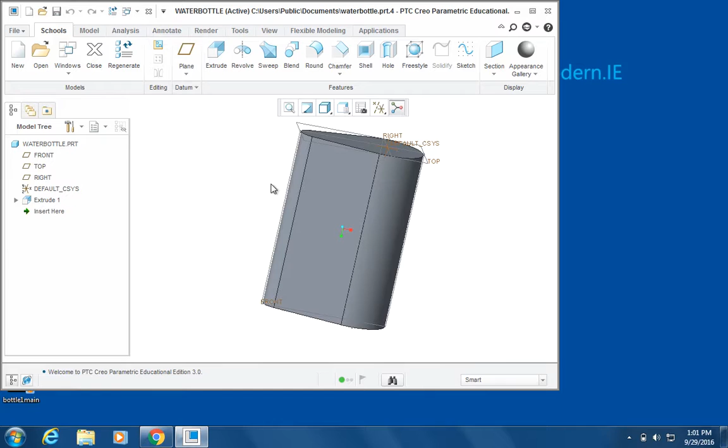Remember that we had created a two-dimensional sketch. We had joined two circles of different diameters with tangent lines, drew our sketch, and then extruded that sketch into a three-dimensional object, which is what we have here.

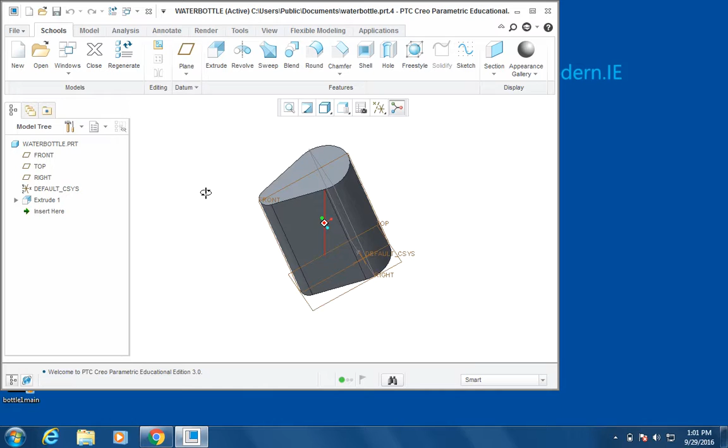The next thing that we're going to do is start to cut out the handle. So if we take a look at the PDF, we see that there's a hole in the body of the water bottle, where a handle should be.

So this isn't just a straight cut through. This is actually part of a revolve.

Part of the ergonomics of the water bottle is it's designed to be carried by a runner or by an athlete as they're exercising, and so it needs to be comfortable, it needs to fit comfortably in the person's hand.

So what we're trying to do is, from an ergonomic standpoint, the human body doesn't like sharp edges, it doesn't like 90-degree angles and that sort of thing very much.

So what we always try to do is try to round and add rounding features, soft rounded features, to all of our edges. We're going to accomplish this cut inside of the body of the water bottle with a revolve.

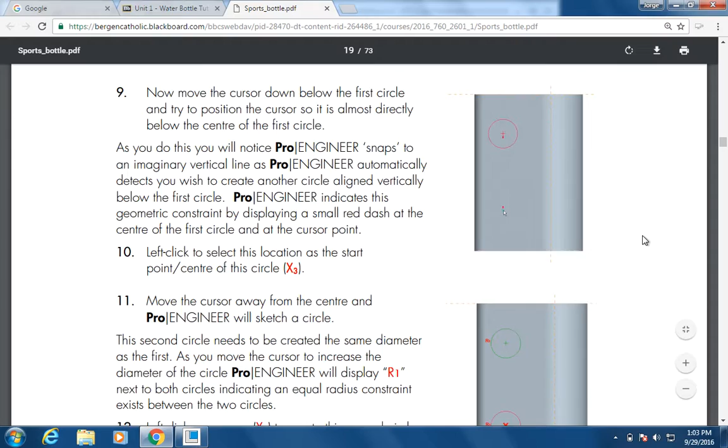The revolve itself, what we're going to do is fast forward here to the sketch itself, and let me find the final dimensioned sketch. Here it is. Okay, let me zoom in on that a little bit.

What we see is basically two circles of diameter 30. So we have a linear dimension on a semicircle here. I know that this is a semicircle because the endpoints of my arc are even with the center point of the circle, so I have a semicircle built from a circle.

The diameter of that circle is going to be 30. So if you take a semicircle or a circle and you measure it at its widest part, you're going to get the diameter.

Down here, this circle is going to be the exact same size as this circle up here. So we're going to constrain the bottom circle to the top circle, and we'll see how to do that in a moment.

The centers of the two circles are going to be lined up along a vertical line, and we'll see how to do that. And then we have other dimensions that tell us exactly where on this bottle this cut, or this sketch, is.

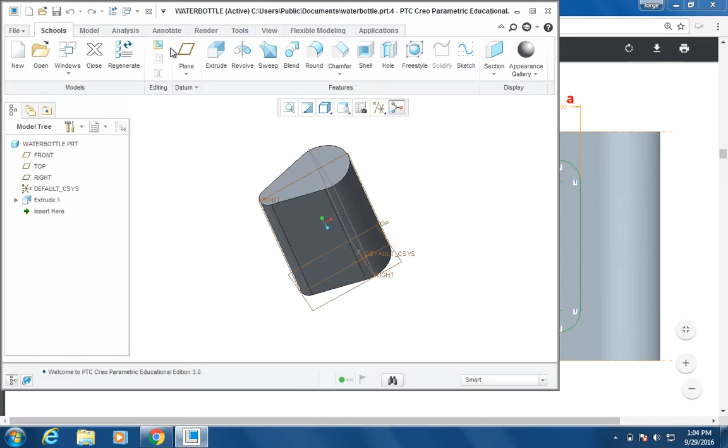So let's go back to our bottle, and let me expand that view a little bit. Okay, there we go. The first thing I want to do is set up my view again.

Default CSYS, that default CSYS is kind of in the way, so I'm going to go to the View tab and turn off that view. But I need my planes view to be on.

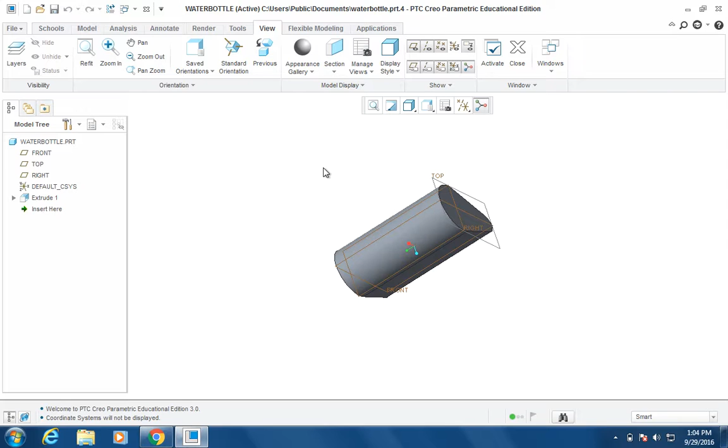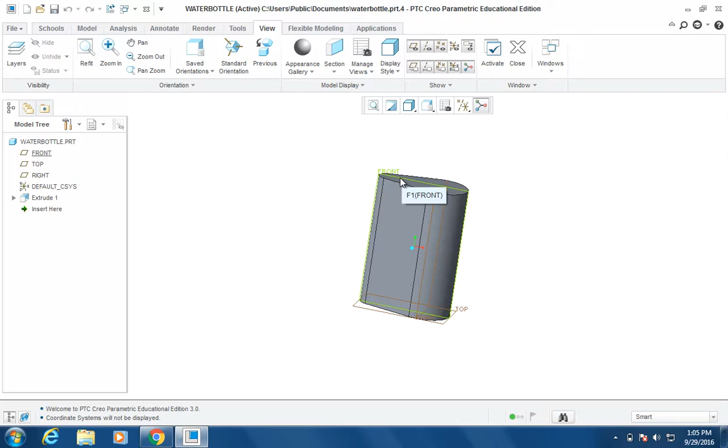For this exercise, I'm going to roll my bottle over so that it's more or less in this view, because ultimately what we're going to do is draw on the front plane.

So we're going to draw on the front plane, and I want the skinny side of the bottle to be to my left. We can always modify that in the sketch setup, but it's usually easier if we just get the model in more or less the view that we want from the get-go.

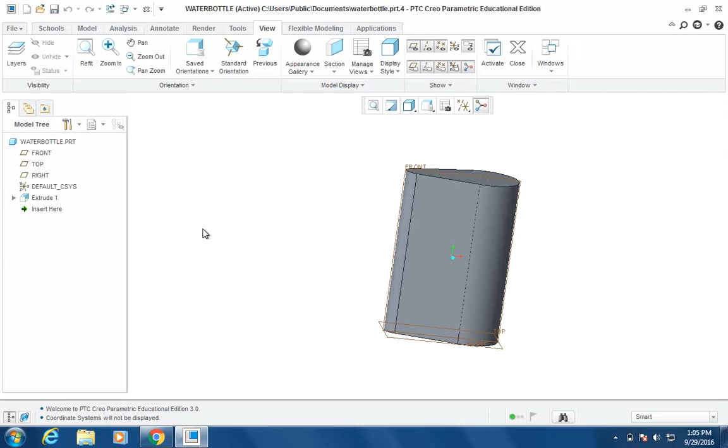So here what we're going to do, we're going to go back to the Schools tab. Remember that all of the tools that we need to add features to our three-dimensional model are going to be under the Schools tab.

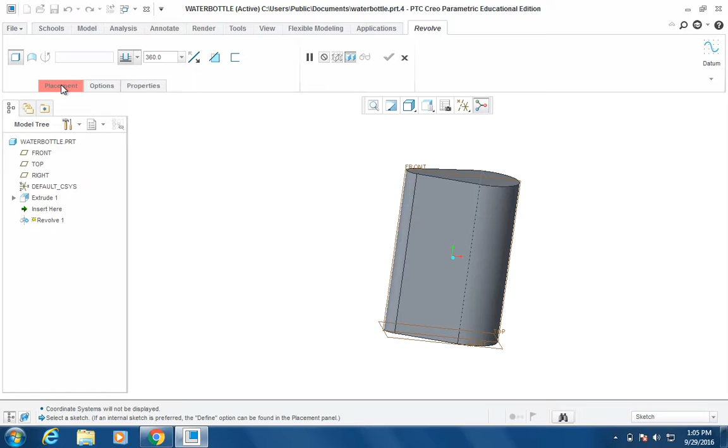This time we're going to create a revolve. We're going to click on revolve, and we're going to place the sketch. Creo tells us that it needs to know where to place the sketch, so we'll click on that, click on define.

Then what I want to do is take a look and make sure I'm selecting the correct plane. In my case, it's going to be the front plane.

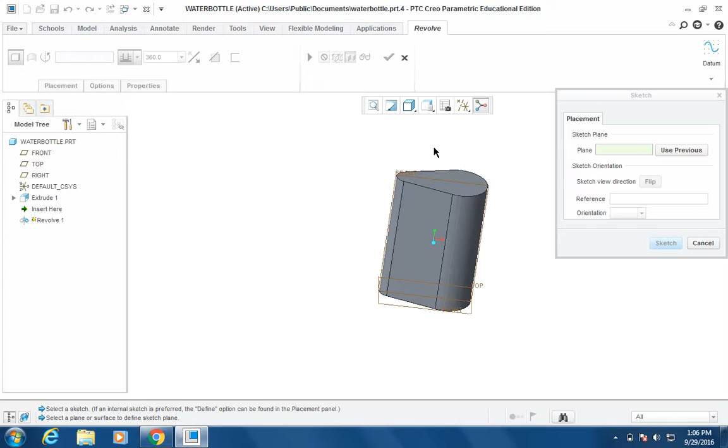I want to draw on the plane that bisects the bottle into two equal but opposite halves. So I'm going to select the front plane, click on that, and then go ahead and click on Sketch.

All right, so we're back in the Sketcher toolbox. The Sketcher toolbox for a revolve and the Sketcher toolbox for an extrude are basically the same thing. We have access to the same tools. So we're going to use the circle tool, the center and point tool to start.

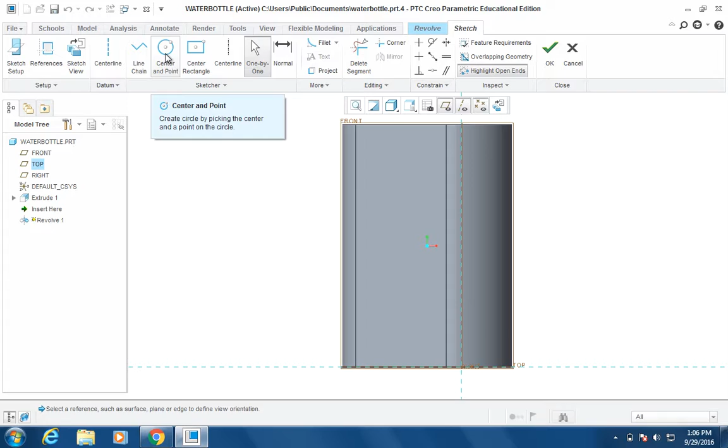I'm going to draw two circles. For the first circle, I'm going to select the tool. Remember that we have to set the center of the circle somewhere. It doesn't really matter where we set the first one. I'm going to left click and release, drag it to an approximate size. It doesn't have to be perfect. Then left click again. So I've set my first circle.

Now the second circle, what I want to do is make sure that I draw it directly below the first circle. So as I drag that center point around, you can see that at certain moments I get a little dash pointing at the center of the first circle. That tells me that proposed point is directly below, on the same vertical line as the center of the first circle. So that's where I want to be, directly below that first circle.

When I click and release and start to draw the circle, at one point I'm going to get an R constraint. That means an equal radius constraint, which means my two circles are the exact same size right now. Because if I have two circles with the same radius, that means they have the same diameter, which means they are exactly the same size. So I set up my second circle to be directly below and the same size as the circle above it. I'll left click again and set my second circle.

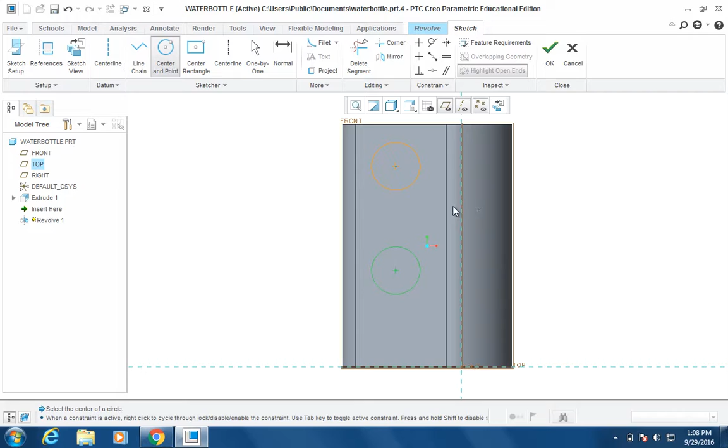I'll deselect my tool. If we zoom in on the dimensions, you'll notice I have a dimension for the first circle in terms of diameter, but not for the second circle. What I do have is an R1 constraint between the two, and if I mouse over that, it tells me constraint equal radii. Obviously this constraint is going to be strong, so no matter what I do to the first circle, it's going to affect the second circle.

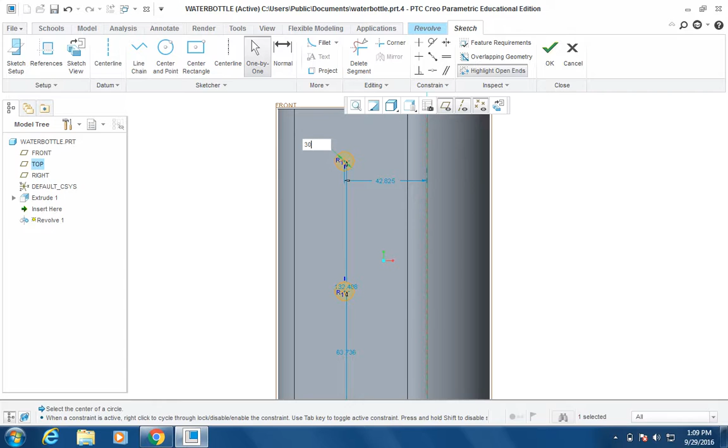I know that the diameter of the first circle has to be 30, so I can go ahead and set that. If you watch the bottom circle while I set the diameter for the first circle, you'll notice it expands as well. So if I change that value to a smaller number, say 10, you can see a much more marked difference. We know the circle itself needs to be, let me double check my dimensions, 30. So I set that value to 30, and the second circle underneath it is the same.

The next thing I want to do is connect the two circles together with tangent lines. Again, I can use the line chain tool. There's a couple of different ways to do this. Since the two circles are the same, I can start the line segment at the midpoint, or on the same horizontal line as the center of the circle, or I can just connect the two and use the tangent tool like we did in the first part of the body of this bottle. But we'll shortcut this a little bit.

I want to start that line segment on the same horizontal line as the center of the first circle. Left click and release, pull that line segment straight down, and we'll release when we get either a tangent constraint, a T constraint, or that same horizontal constraint, the point on horizontal line constraint as before. Once I get that, I can click, and then center click to deselect the current line. We're going to do the same thing on the other side, with the same kinds of constraints.

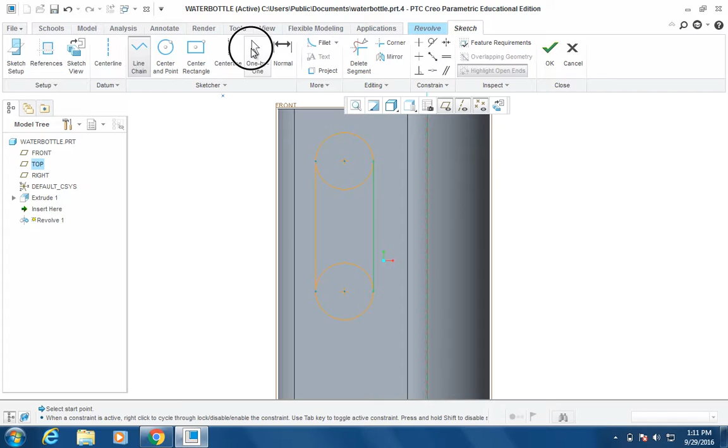And then I'll deselect the tool and see where we're at. Okay, so here you can see I have a couple of constraints here. This is telling me I have a tangent constraint, and down here a horizontal alignment constraint. When we're dealing with circles that are exactly the same size, it doesn't matter, right? It's the same kind of constraint. It might be called something different, but it gives me the same rules for both kinds. Over here, we have a tangent constraint at the bottom and a horizontal alignment constraint on top. All right, so that's good there.

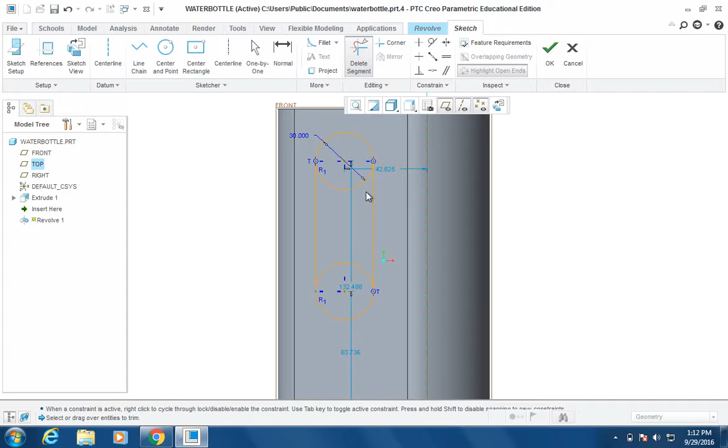Okay, the next thing we want to do is trim away the inside arcs of these circles. Remember we did that in the first example as well, using the delete segment tool. So I'm going to select the delete segment tool, click on the first arc, click on the second arc. And now basically the sketch, in terms of its basic appearance, is correct. I can go ahead and deselect that tool. Creo lets me know I have a good sketch so far, that it knows where it's going to add or remove material, because it's all colored to the inside now.

Okay, next we're going to place the sketch. So where exactly on the body of this bottle does the sketch belong?

Okay, so the first thing we look at here is this dimension. I know that the top of the arc to the top of the bottle is going to be 20, and then the bottom of the arc to the bottom of the bottle is going to be 20 as well. Again, I don't know how long these tangent lines, these vertical lines, are. I really don't care in this example. We can always figure it out if we have to, but we don't really care. All I know is the bottom of the arc is going to be 20 from there, and the top of the arc is going to be 20 from there.

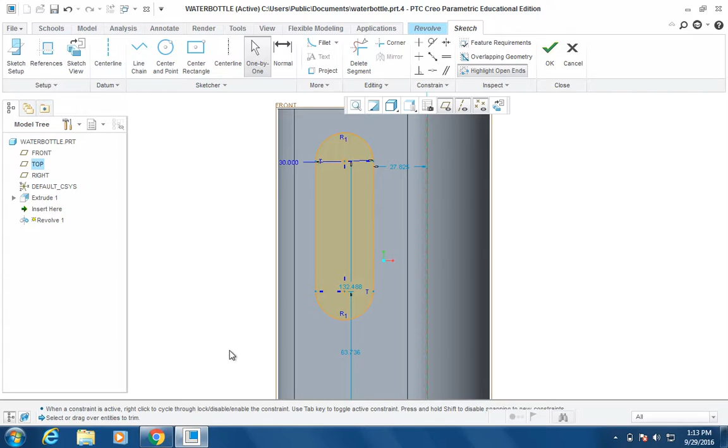So we'll go ahead and set those dimensions. To do that, let's zoom out a tiny bit. Okay, we're going to use the normal tool. The normal tool creates dimensions for us - it's either going to give us an angle dimension, an arc or radius dimension, or a linear distance. So what we're going to do is set up a linear distance here.

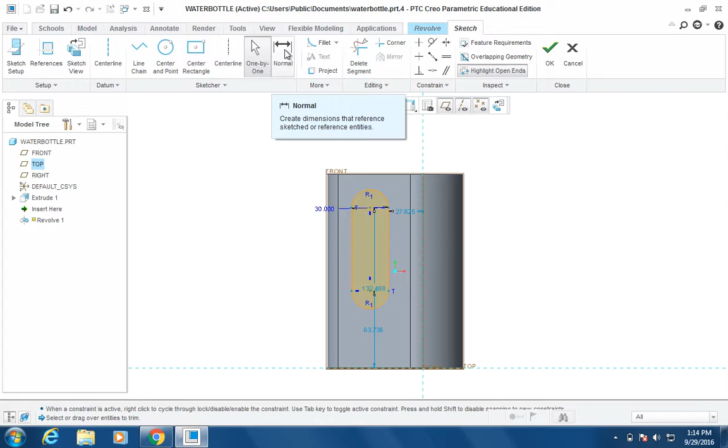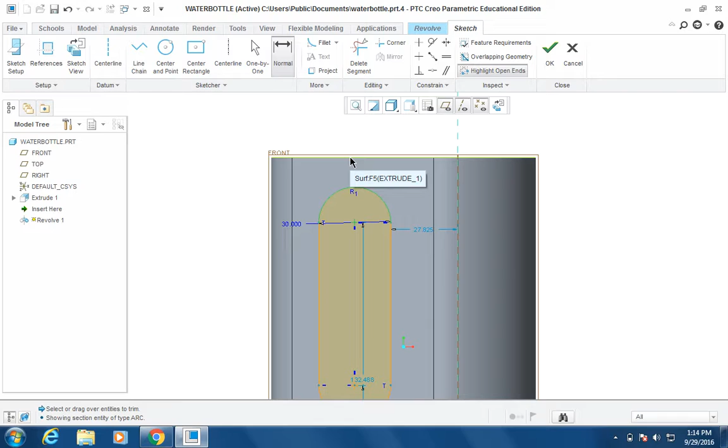I'm going to click on the normal tool. The way this tool works is we left click on the first entity we want to set a dimension to, then left click on the second entity. So we left click on the top of the arc first, then left click on the edge, that top surface of the bottle, second. Then I'm going to center click somewhere between those two points.

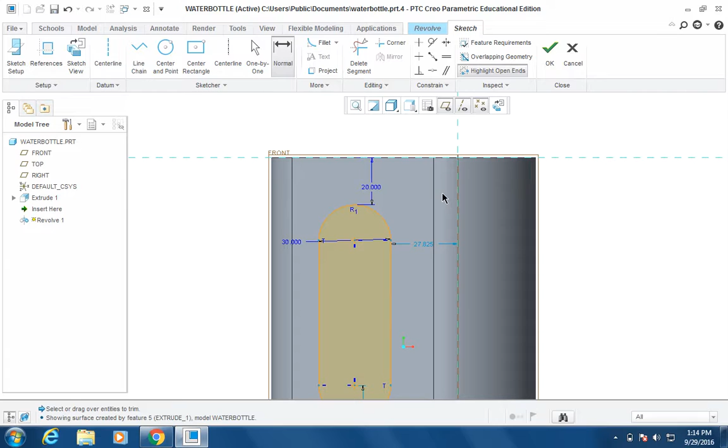A dialog box, a text box, pops up right away and asks me what distance I want here. So I'm going to go ahead and set that value to 20 and hit enter. You can see the whole sketch has been pushed down so that it's the correct distance from the top of the bottle.

We're going to do the exact same thing on the bottom. Let me slide down here. I still have the normal tool selected. I'm going to select the arc, left click there. I'm going to select the bottom edge of that bottle, or the line reference - there's a reference there, so I can use that as well. Left click there, and then center click between the two points.

It's going to ask how far away it's going to be, and we'll set that value to 20. You can see the sketch got pulled to the correct size. It's the right size now, just not placed properly yet, but we're getting there.

We can go ahead and deselect the normal tool. Next we want to look at the distance from the left edge of the bottle. Even though this is a rounded surface, when dealing with two-dimensional sketches, we always think about edges. The way Creo refers to these rounded edges is a silhouette.

Think about it like a shadow. If this bottle was to cast a shadow, where would the shadow be? We take a look at the distance from the vertical line of our sketch to the edge, the silhouette of the edge of the bottle, and that distance is going to be 25. That's what these lines indicate.

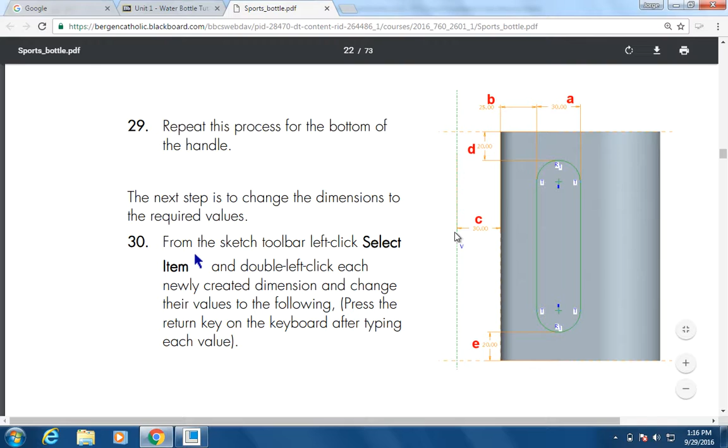So we're going to go ahead and set that dimension. Using the normal tool, I'm going to select that left edge, that left silhouette, so you can see it highlights in green, and I also get a pop-up that says SILH, which is for silhouette.

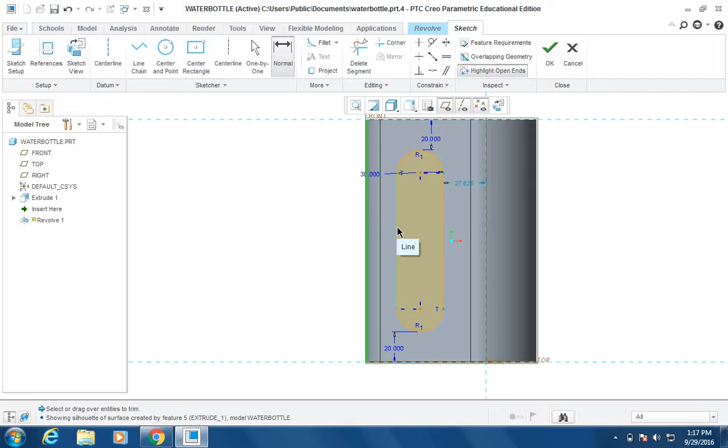I'm going to left click on the leftmost vertical line of my sketch, and then center click between those two points. It's going to ask me again how far do you want that distance to be. I'll say 25, and it will push or pull the sketch into the correct position.

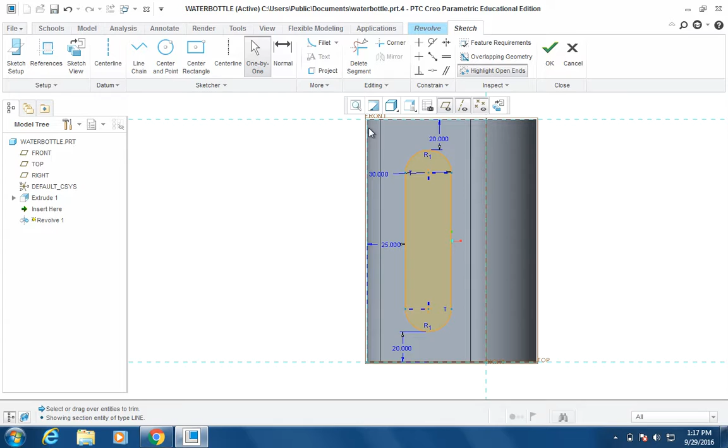At this point I actually have the sketch in the correct spot. Everything is where it should be. I'm 20 from the top, 20 from the bottom, I have a diameter 30 circle. Let me deselect that tool. I have a diameter 30 circle, and I'm 25 from the left edge. All that stuff is good.

The last bit of a revolve is to specify around what axis we are revolving. Anytime we deal with a revolve, what line are we going to spin that drawing around to create our feature? According to our sketch here, or our schematic, we have this axis out in space, which we need to create.

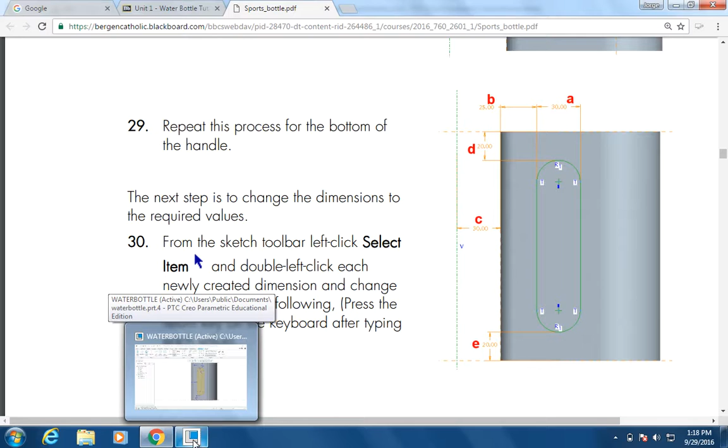We're going to go back to Sketcher in Creo, and we know this is going to be 30 away from that edge. So what we're going to do is create a center line. Go to Datum and create a center line, or select the center line tool.

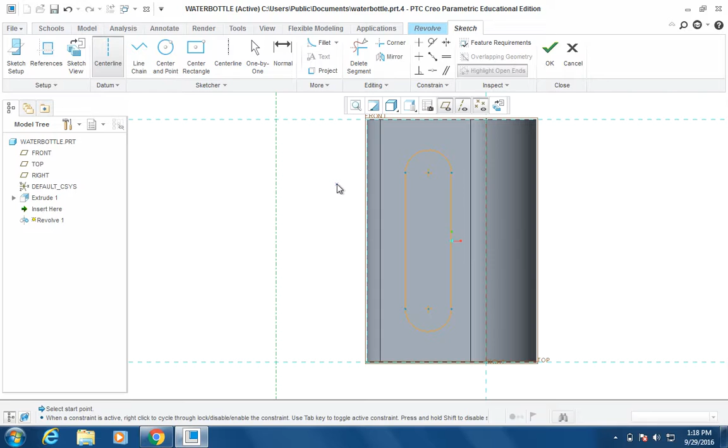The center line tool works by placing an X somewhere in space or somewhere on the model, and then we can rotate it around until it gives us a vertical line. Obviously we are revolving around a vertical line in this setup, so I'm just going to left click to set that center line out in space.

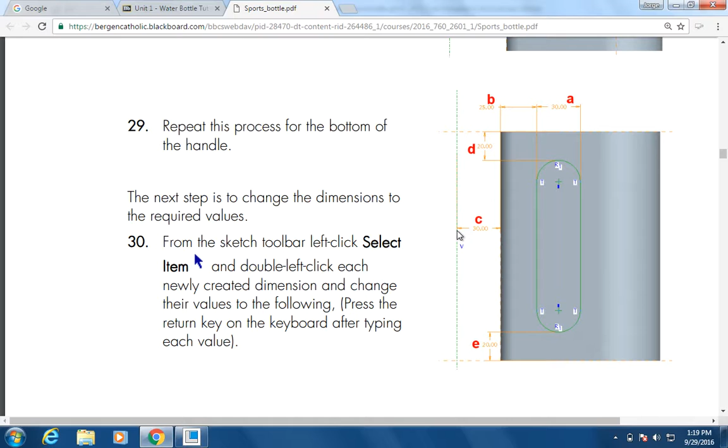The next thing we want to do is set the distance of the vertical line of that axis we just drew to the left edge. If we take a look at this schematic, this 30 tells me that from the left edge of the bottle to the axis, or to the center line, is going to be 30.

So I'm going to use the normal tool. I'm going to select the center line, then select the left edge of the bottle, so left click, center click here, and we're going to set that value to 30.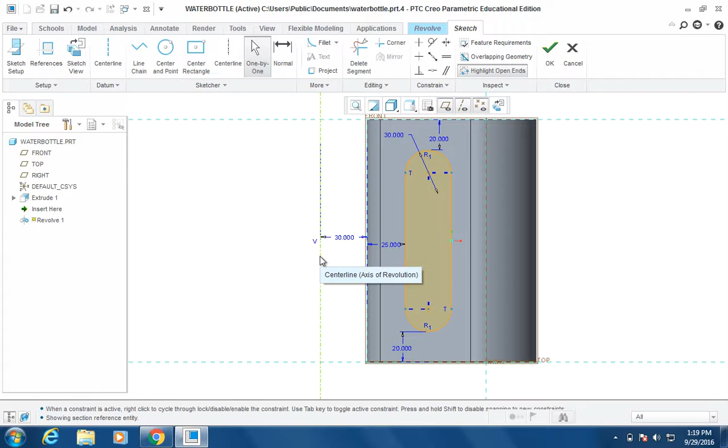Deselect the normal tool. The last bit of this is we need to specify that this axis is going to be the axis of revolution. In previous versions of Pro E, we would have to specify that that was going to be the axis of revolution, but here on this new version of Creo, it automatically sets that axis as the axis of revolution when we use this datum center line.

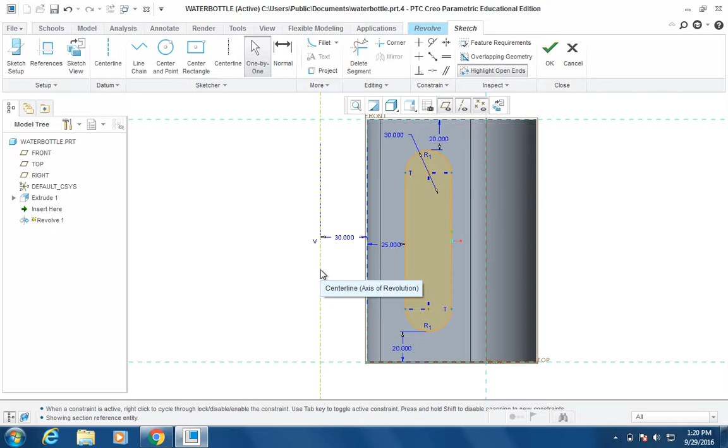If we're not sure if we set an axis of revolution, just mouse over the center line, and it tells us in parentheses axis of revolution. If we used the wrong tool or the wrong center line, under Sketcher instead of datum, we would select the center line, right click out in space, and then select axis of revolution. So we get to the same spot.

At this point, we're ready to revolve. I have a good sketch, I have a center line, I have an axis of revolution. I have a good sketch, I don't have any weak dimensions, everything seems to be where it should be. I'm going to go ahead and green check mark that to get out of Sketcher.

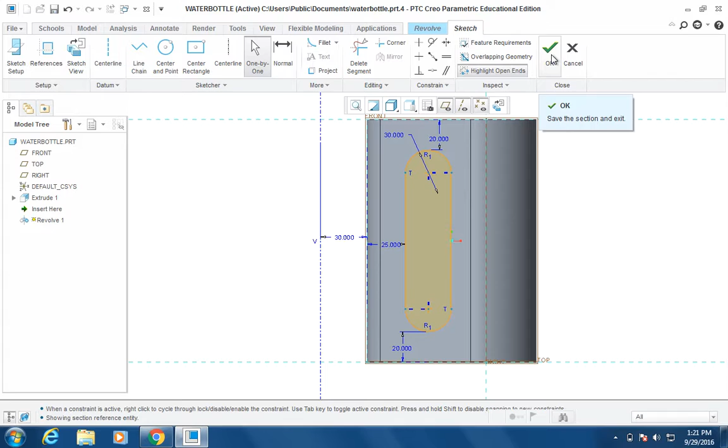Creo is smart enough to figure out that I probably want to remove material, and in this case Creo guessed right. If I wanted to add material instead of removing it, I would go up here to the dashboard to this toggle button and toggle back and forth between adding material or removing material.

This dimension here, 360, is 360 degrees. When we create revolves, most of the time we want to revolve all 360 degrees, but every once in a while we don't want to go 360 degrees. Maybe we only want to go 45 degrees or 90 degrees or whatever it is. We could set that value here.

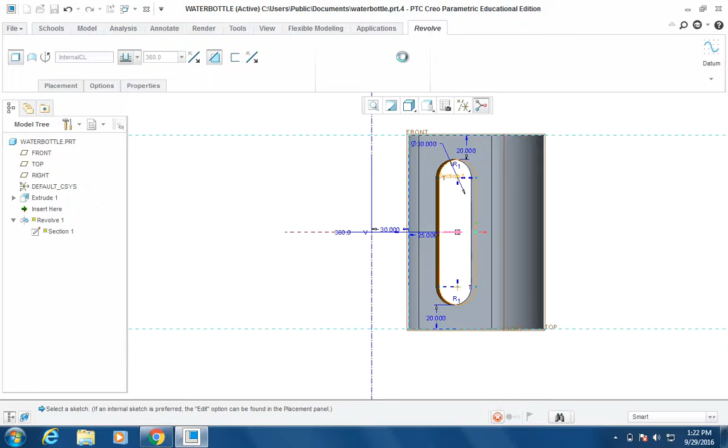In this case, we want to revolve 360 degrees and remove material because we're cutting through this area here. Everything seems to be fine in terms of the cut, so we'll go ahead and green check mark that. There is our cut. Save it right away, and then we are good to go here.

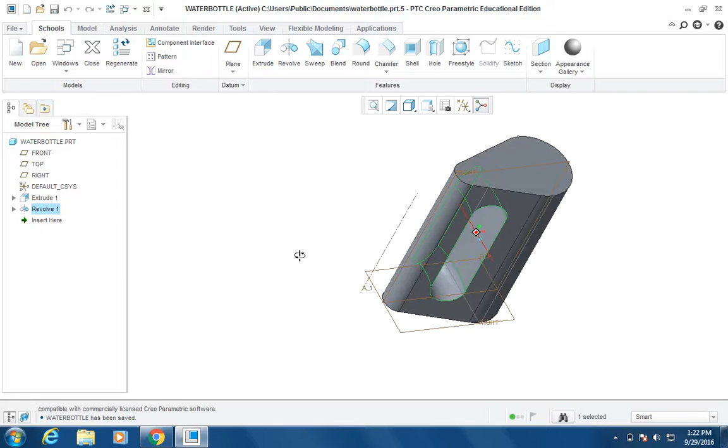In terms of the cut, if we keep it highlighted and selected in our model tree, we can see that we have a rounded cut through the bottle. To finish the handle, we're going to use the round tool to set these hard edges to a softer, more rounded, friendlier edge. So we're going to select the round tool.

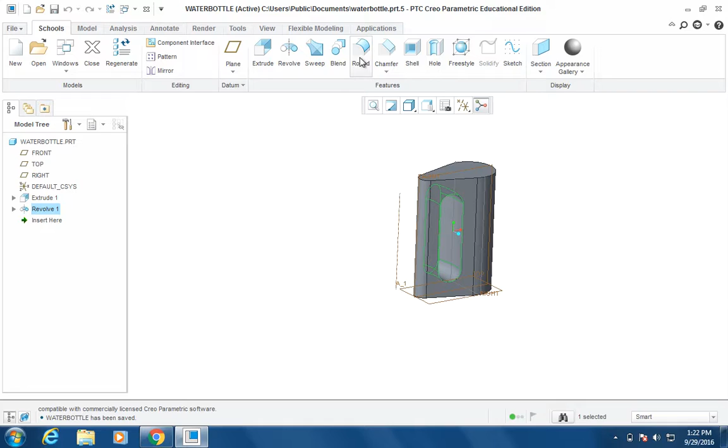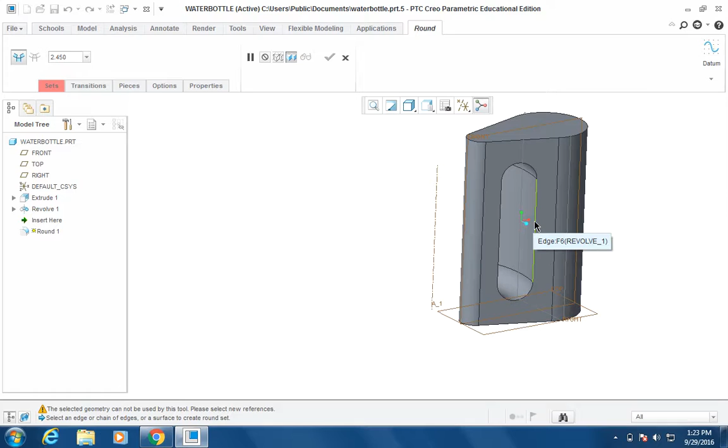Then we create a set, an edge set. Holding the control key, I'm going to approach the edge of that cut that I just made, and I found I get better results when I select one of the straight edges. So I'm pressing the control key and clicking on that edge. Then you'll see that the entire chain of connected edges is also selected.

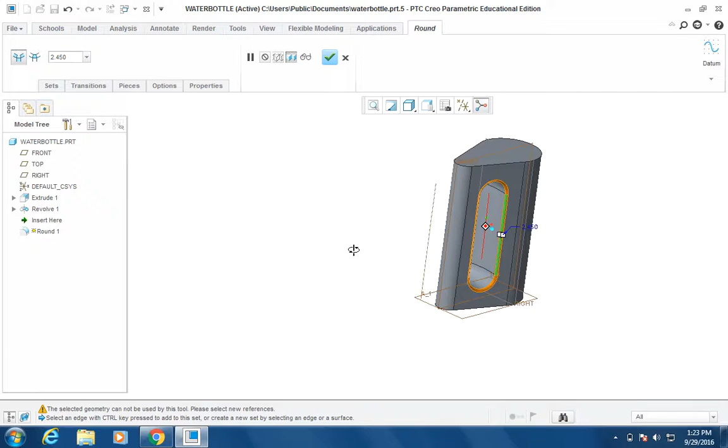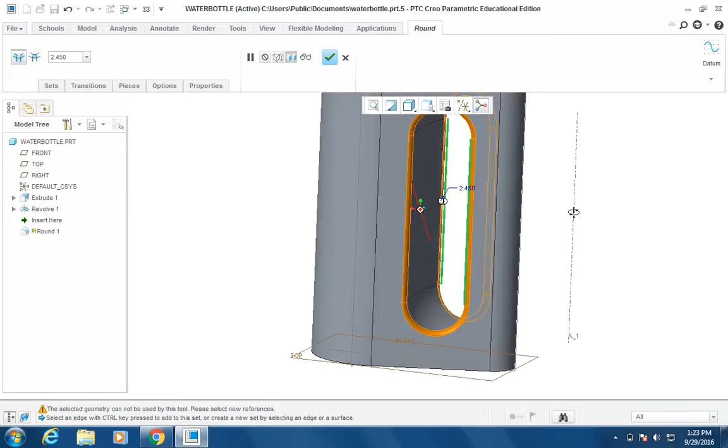I'm going to roll the model around because I want to do the same thing on the other side, again creating an edge set. I'll zoom in here, press and hold the control key, and select the edge—make sure you are selecting the edge. Now I have both edge chains selected on either side of the bottle. Next I need to set the radius of my rounds.

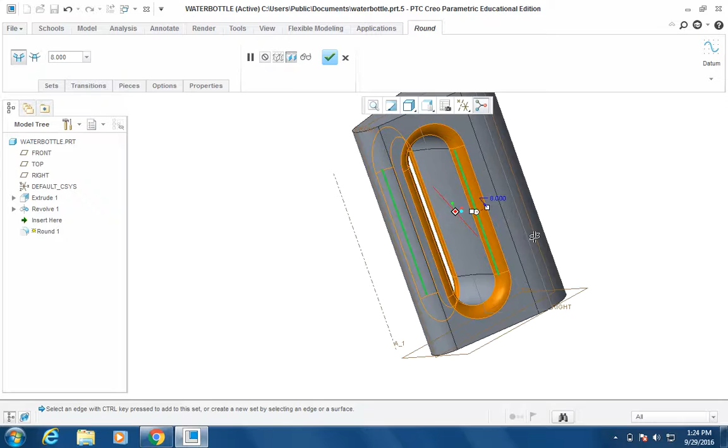For this example, the radius of the round was 8, so I'm going to hit 8 and tab. I see a preview of what I have so far, and it looks good, so I'll green check mark that. Now you can see—save it right away—that our handle is pretty much complete here. All right, so that's it for this part

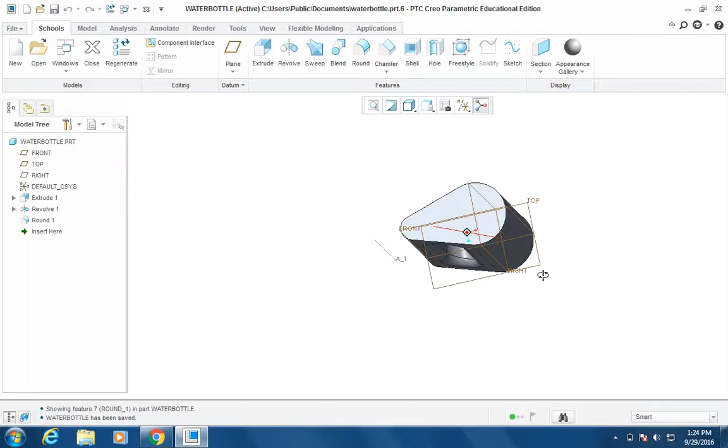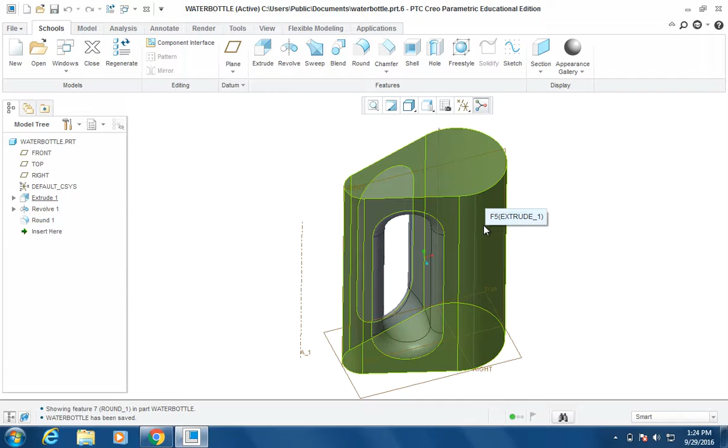of the tutorial. In the next video, we'll take a look at how to add the neck of the bottle, how to round the top and bottom of the bottle, including the connection of the neck to the bottle, and then how to shell the bottle so that it's actually hollow, so it's actually a bottle and not just a big old chunk of plastic. All right, so we will see you in the next video. Thanks.